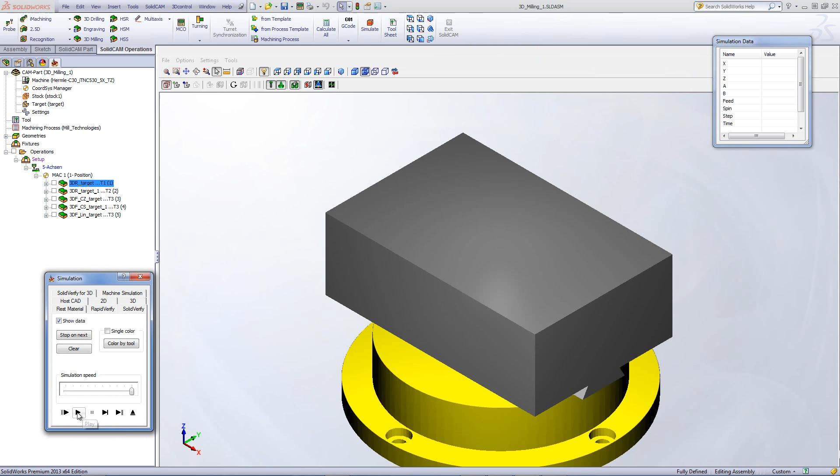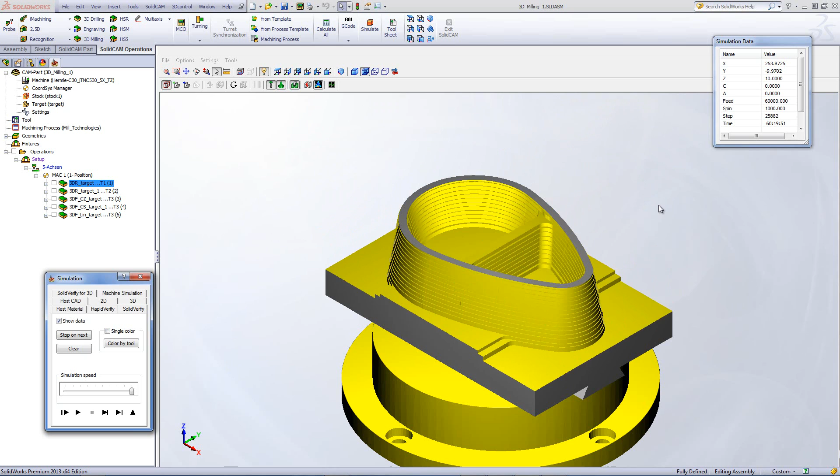If we take a quick look at our simulation, you'll see that the tool works from the outside, doing a constant Z contour cut, clearing off all the material and stepping down every 5 millimeters. But there's still plenty of material left to do a rest roughing machining on the part itself to get into areas where this particular tool may not have gotten into, and also to lessen the size of these steps over here. Now in the next operation, we'll be doing the rest rough on the part itself.

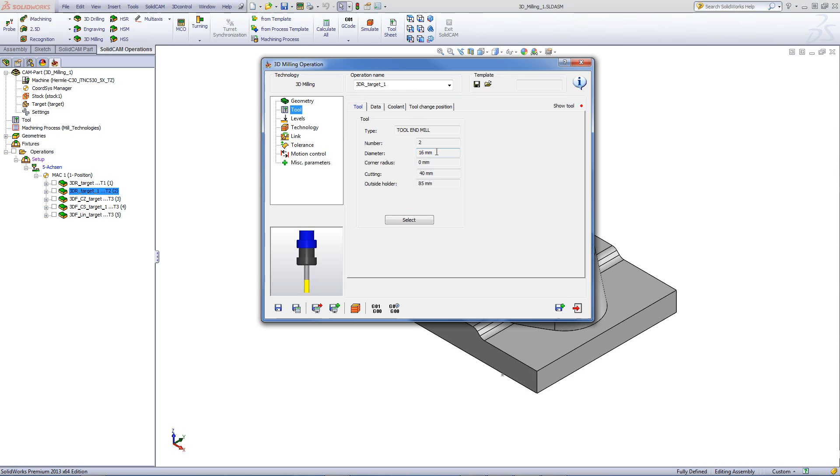We'll be using the exact same strategy of roughing, this time going down 2 millimeters, leaving 0.5 millimeter of material for the finish. But let's go into the tool for a moment. You'll see we'll be using now a 16 millimeter end mill. And if I go into my geometry area, my working area, you'll note that we have the option of cut only the rest material checked off. This will allow me to cut only in the areas where there's material to be taken off, such as material that was left over by the previous operation.

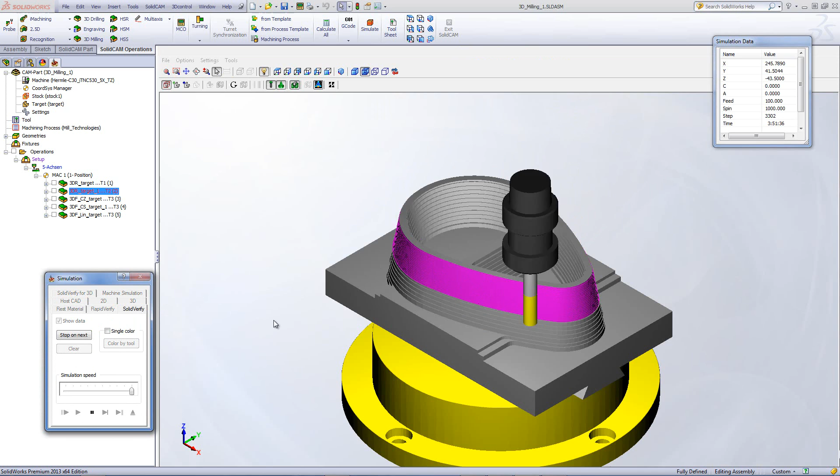Taking a look at the simulation itself, you'll see that the tool will work only on those areas, making for smaller steps in this area over here, as well as smaller steps inside here, and taking off the excess material inside here where the previous tool could not go in.

Next, we'll start with our finishing cuts by first machining the steep areas, such as these walls over here and inside over here as well. For that, we'll be using the constant Z option inside 3D milling. The tool in this particular case will be a 10 millimeter ball end mill. Going back to geometry for a moment and going into the working area, you see that we'll be working on specific faces. If I were to click on show, you can see that these are the faces that we want to work on. And I've also limited it to work anywhere between 30 and 90 degrees. So even though these faces were picked, the end mill will not work on those surfaces.

In addition, we've added check faces. I do not want it to touch these surfaces, but not only do I not want to touch them, I gave it a 0.1 millimeter offset to make sure that it does not touch any of those surfaces. Going into my technology, you can see I'm using the constant Z option, and in my data, you can see the scallop that I'm using for finishing off the part.

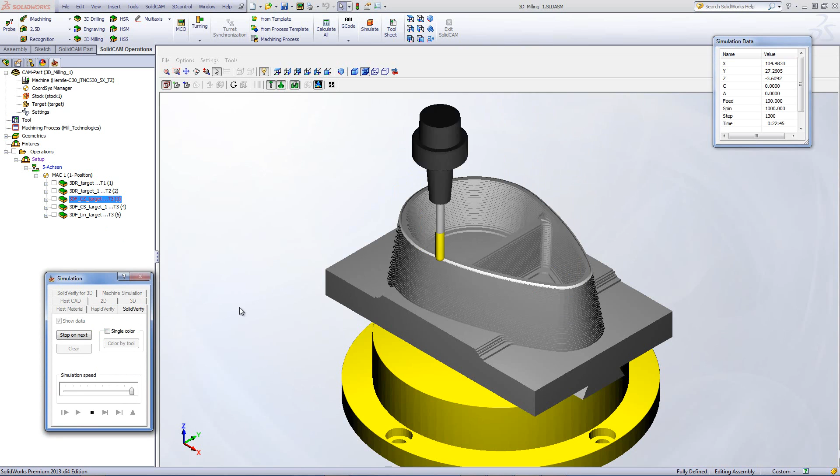Taking a quick look at the simulation, you'll see that the tool goes down, machines out this entire wall over here, and since I gave it a very small scallop, it will give a very, very good and clean surface finish on the part itself. This is done on the outside as well as on the walls inside.

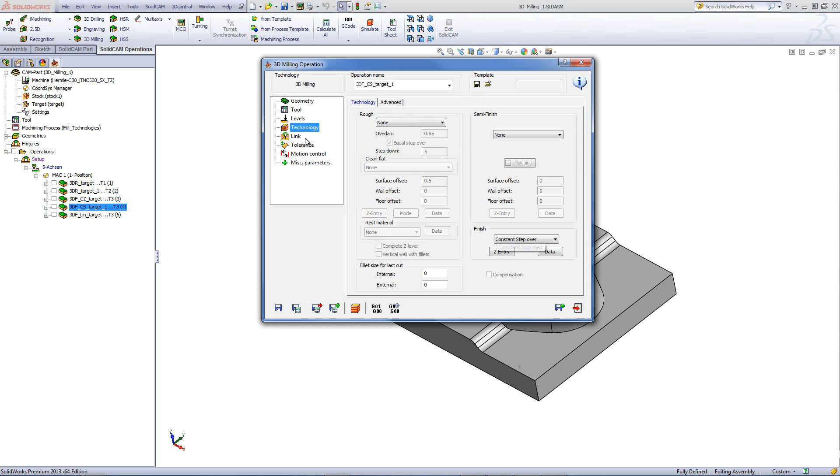Now, in my next operation, I'd like to work on the shallower areas, such as these radiuses here on top, as well as these floors over here. So for that, we've used the option in 3D milling of constant step over. The tool will again be the 10 millimeter ball end mill. In my geometry, again, I'll use the work on selected faces, the same faces I had before, but this time I limited it between 0 and 30 degrees. This way, it'll work on the shallower areas of the part itself.

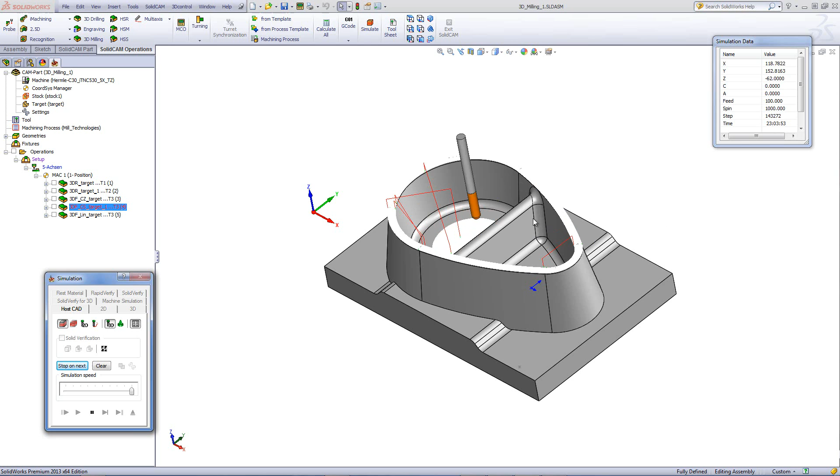Taking a look at the simulation, you'll see that the tool works around the top edges this time until it reaches the 30 degrees of that area itself, and then goes down to working on that floor, finishing up this floor, and then later on finishing up that floor, as well as this radius will also be finished in this operation.

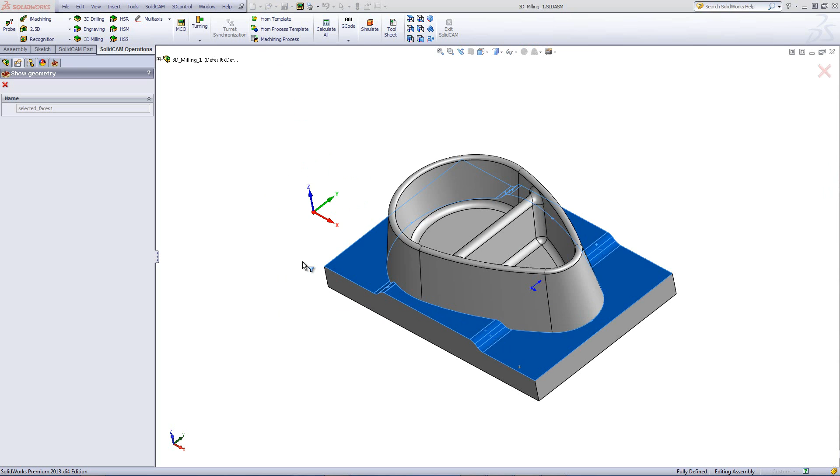Now, to finish off these areas over here, we've used the option of linear inside my 3D milling operation. If I were to go into the operation itself, let's first look at the working area. This time you'll see that the working area that we want to work on are these floors, and the check faces are the faces that we worked on before. And again, from the check faces, we'll be staying away 0.1 millimeters. Taking a quick look at the simulation, you'll see that the tool now is working across the part using linear cuts to finish off the part itself.